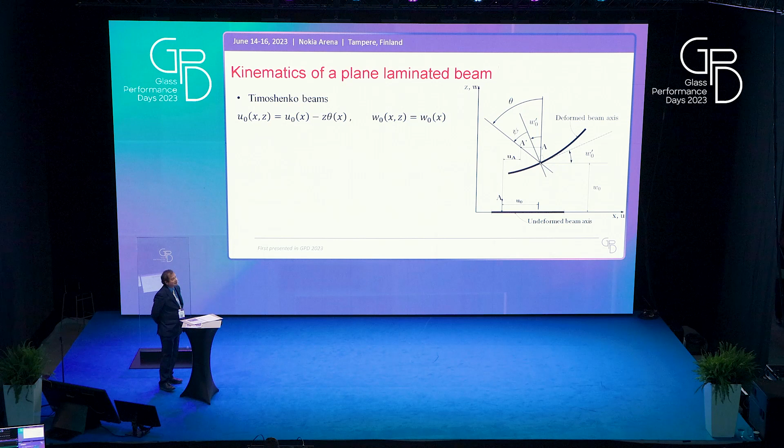So let us start: in a laminated beam it is very important to take into account the shear deformation, and this is taken into account by the way in which the cross-section warps. There are many models which provide different levels of accuracy, like, for example, in the Timoshenko beam, where just the cross-section remains plane.

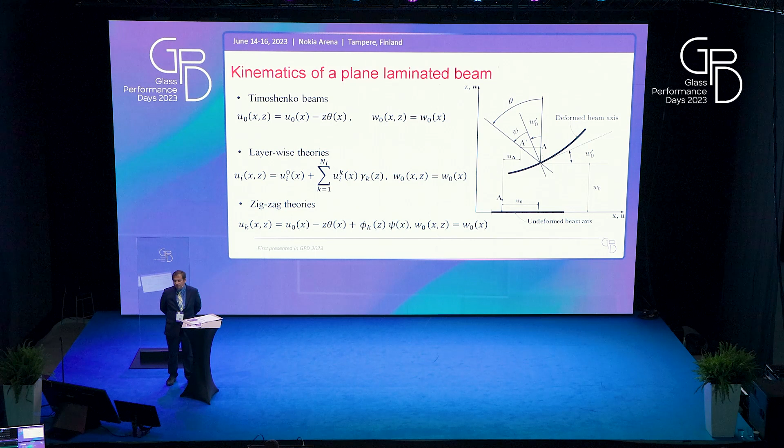Then there are layer-wise theories which take into account the warping via a smooth function, where the shear strain is not constant but varies along the cross-section. Zig-zag theories are very interesting for laminated glass because the warping is associated with a non-regular, piecewise linear function, which provides a shear strain that is piecewise constant in the cross-section. This is just an example of a zig-zag function and the possible warping of a cross-section that comes from this function.

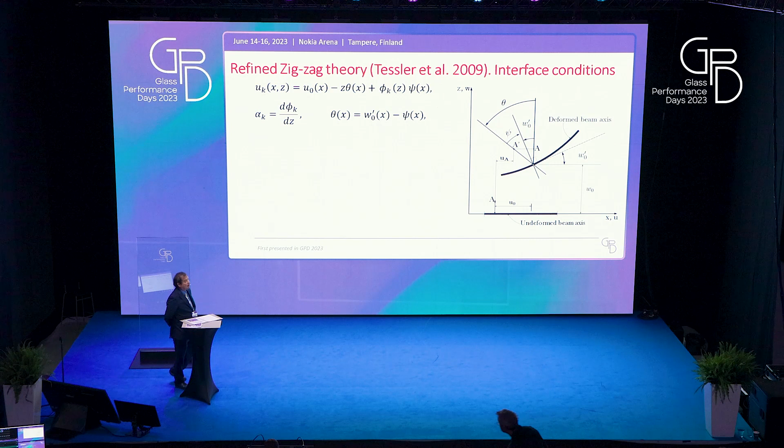In the refined zig-zag theories, the shape of the zig-zag function is not arbitrary but can be obtained from the continuity of the shear stress at the interface between the layers. You can calculate the shape of the zig-zag function from simple equilibrium, and it turns out to depend upon the ratio of the shear moduli of the various layers.

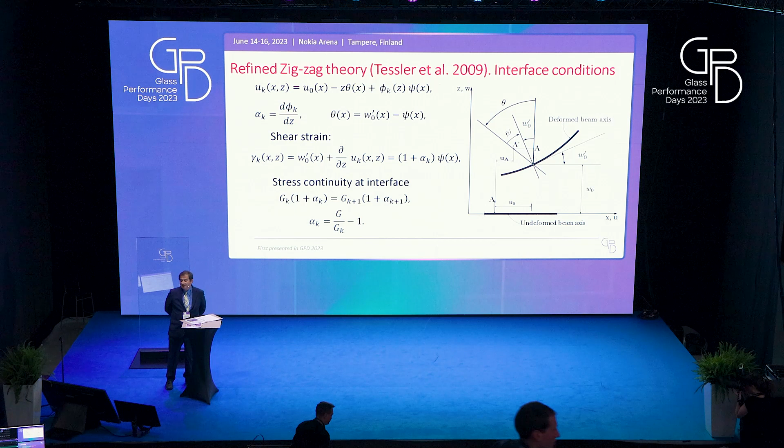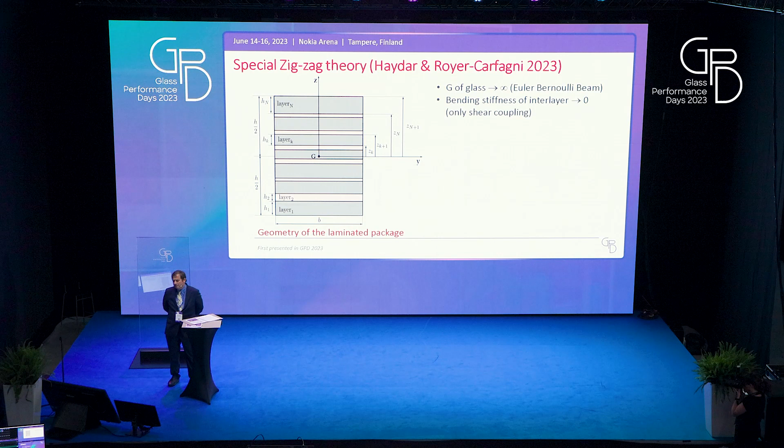What we have tried to do is simplify this model under standard simplifications. The standard simplification is that you neglect the shear deformation in glass, so the glass ply becomes a simple Euler-Bernoulli beam. On the other end, you let the bending stiffness of the interlayer go to zero. This implies that the role of the interlayer is simply to provide the shear coupling of the glass plies.

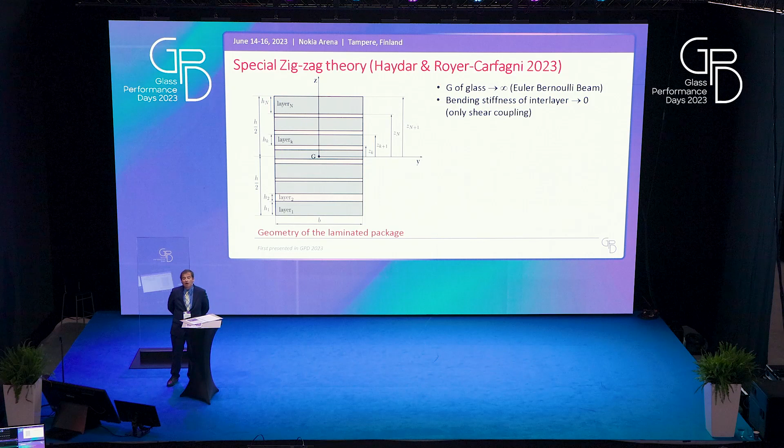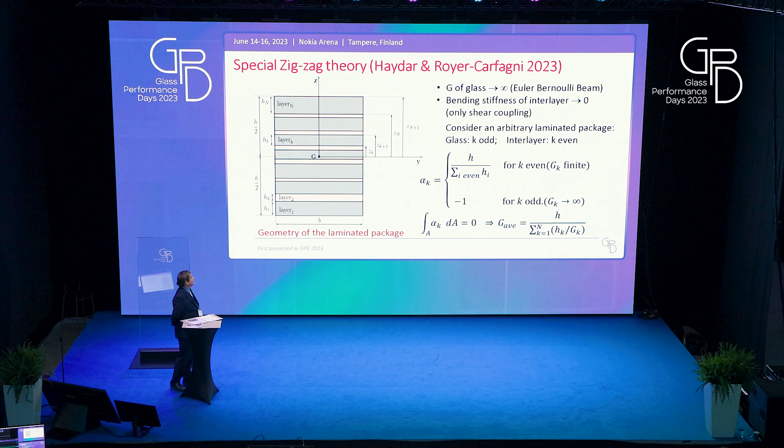If you do this, you have a drastic simplification because the zig-zag function becomes only a function of the geometry and the thickness of the interlayers. In particular, the slope of the zig-zag function becomes -1 on the glass, and depends on the various thicknesses of the interlayers in the other plies, but with no dependence on the shear modulus.

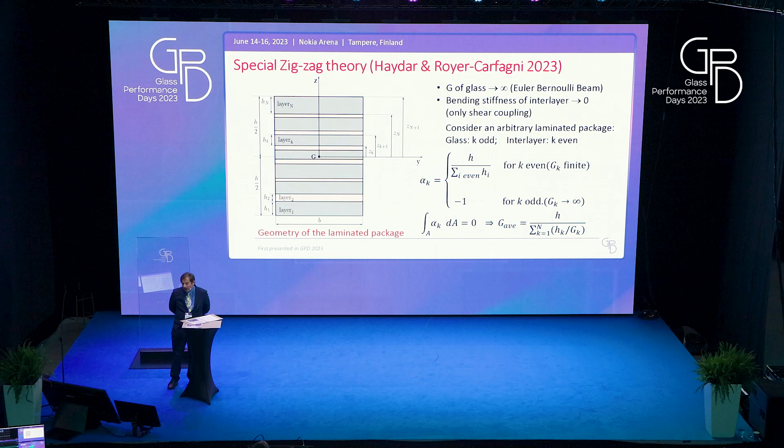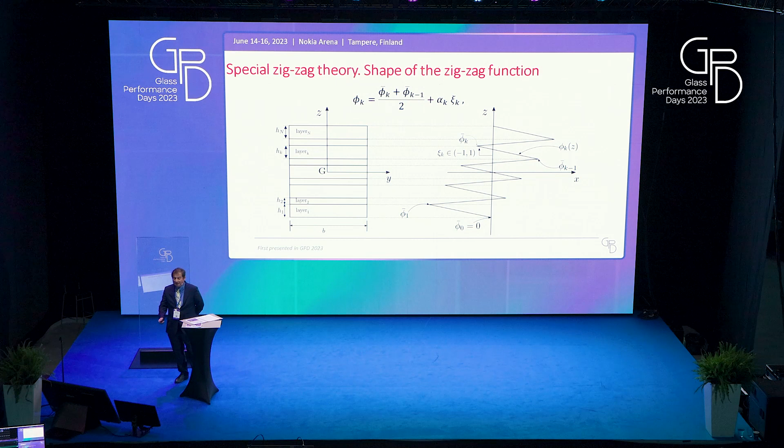This is just an example of the resulting zig-zag function. The important thing is that you can determine this from pure geometry, because the zig-zag function must be zero at the ends, that is on the intrados and extrados. The slope is provided on the glass, and it is also provided in the regions occupied by the interlayer. So, extremely simple.

Now, if you want to build a mechanical model, you have to define, for example, the strain energy and use a variational approach. What we do here is simply say that from the kinematical model you can determine the entire state of deformation of the beam, and you can determine the strain.

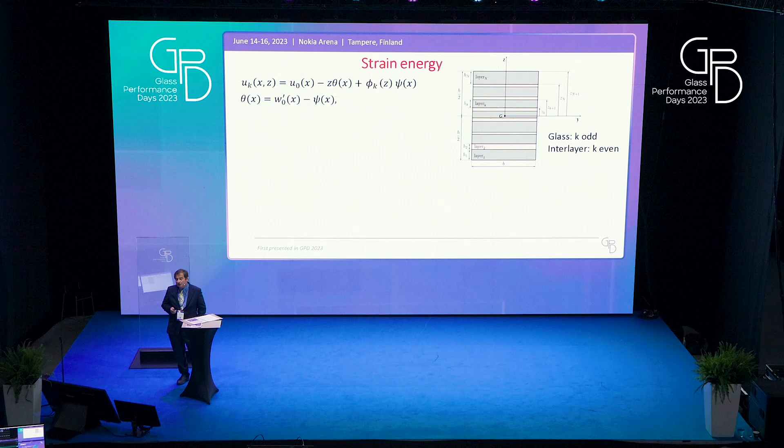We simply say that the glass plies are supposed to withstand bending stresses and axial stresses, whereas the interlayer is supposed to transfer only shear stresses to the glass plies, providing the shear coupling. It is easy from this to calculate all this. The strain energy takes this into account, because the first part is the strain energy of a glass ply, and the second part is the strain energy of the interlayers.

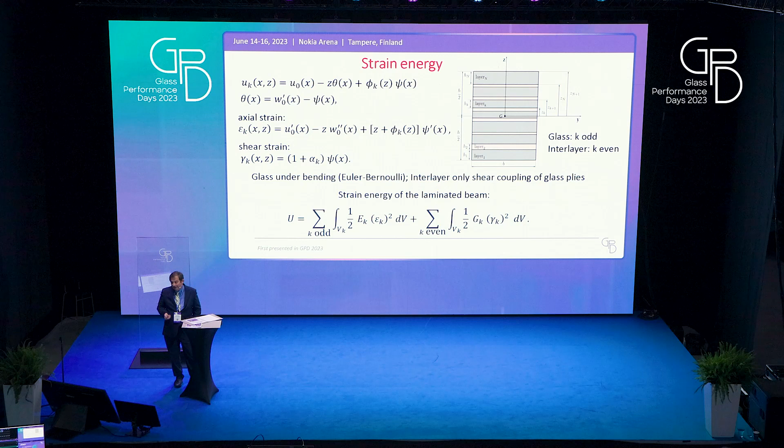For what concerns the analytical numerical solution, you can add any kind of loading and any kind of boundary condition. You obtain via the variational approach the field equations, the boundary conditions at the end, and the matching conditions for any type of geometry, for any type of end constraints.

The variational principle, the variational approach, can also be implemented in a finite element method, very simple and trivial to do. But the nice thing is that the solution of this problem can be found in closed form.

That is, you have a nice, lengthy, but exact expression when the bending moment in your structure is statically determined. So you can determine the bending moment from sole statics, without needing to take into account the deformation of the beam.

And if this is the case, and there are many examples where you can determine the bending moment by sole statics, you can find an exact expression, if you wish, for the effective thickness for any kind of package, whatever the composition of your structure under bending.

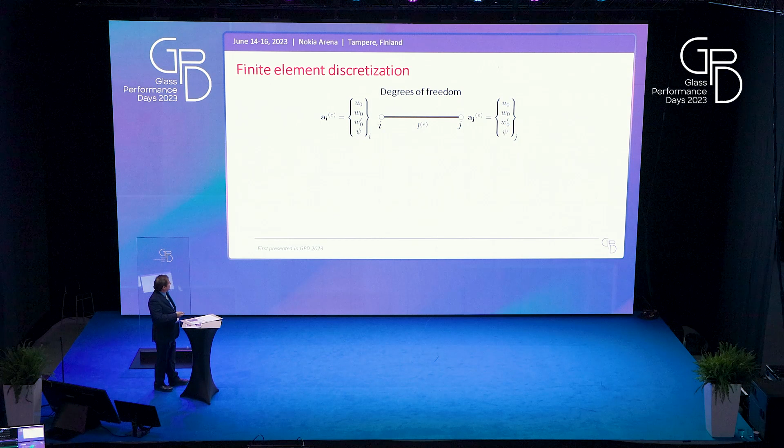The variables are the axial displacement U0, the vertical displacement W0, its first derivative, and the function psi, which takes into account the shearing of the various layers. It multiplies the zig-zag function, which is the same at all cross-sections, but the amount of shearing taken into account by psi may vary from section to section.

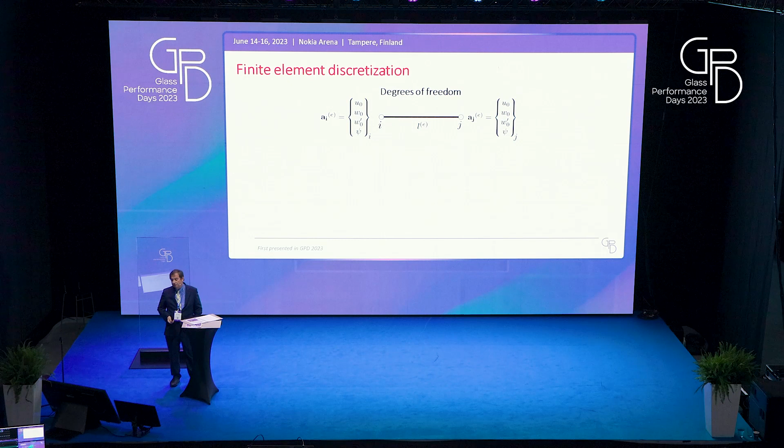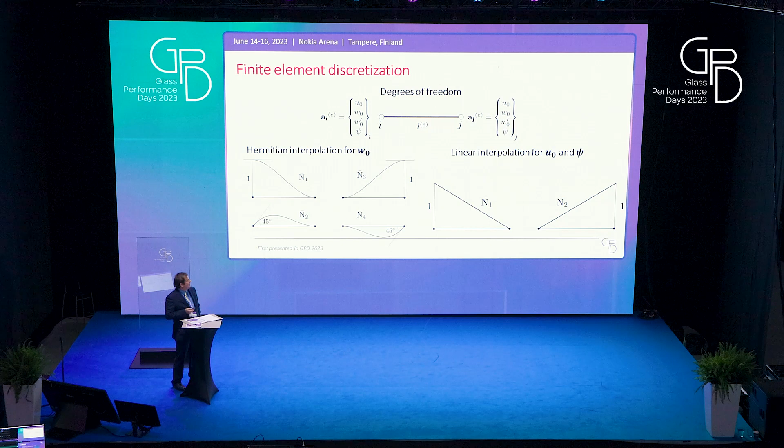So you can consider, for example, taking into account C1 continuity in W using Hermite polynomials, and you can consider a linear interpolation for U0 and psi.

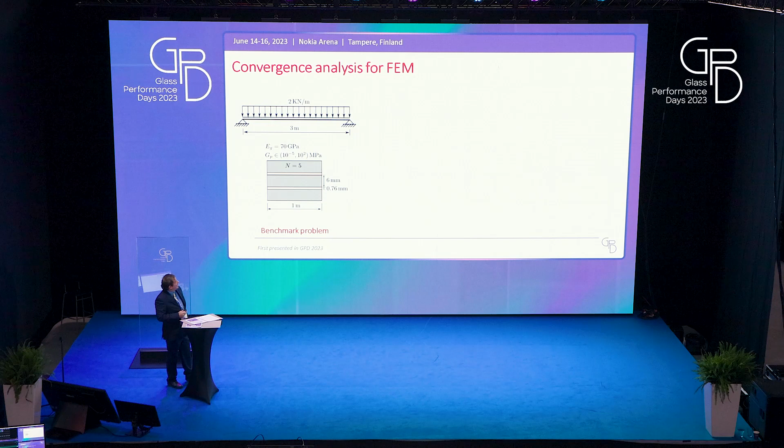This is an example of a convergence analysis for this simple problem. It is a simply supported beam. You can see here what the laminated package is, and you find a very nice convergence.

Here it seems that a large number of elements are needed, but if you are happy with 1% error, you can use 2-3 finite elements for the whole beam.

Now, if you want a very high approximation, you have to be a little more careful. The convergence in terms of displacement is very accurate and very straightforward.

For what concerns the function psi, which takes into account the shearing, the convergence requires a bit more elements to obtain reasonable results.

It's interesting to notice that, for example, psi equal to 0 corresponds to the monolithic limit. In the numerical approximation, it takes a little time to obtain a zero function.

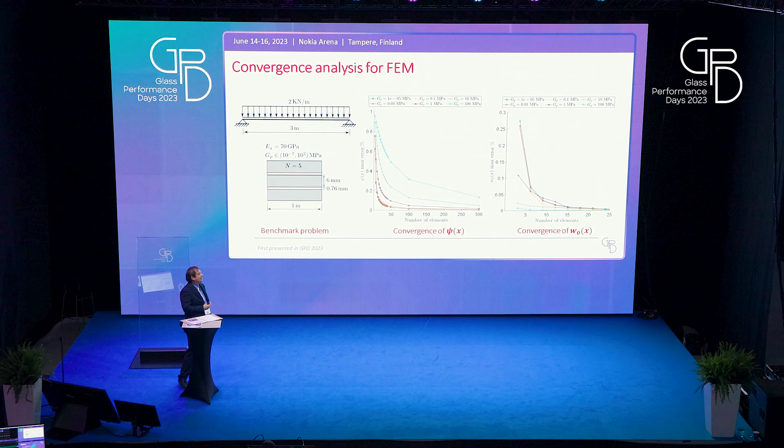On the other hand, when you are close to the layered limit, the function psi takes a certain value that takes into account how much the various plies are displaced with respect to one another.

The convergence in terms of W0 is very straightforward, with errors small even with just 2 or 3 elements. It's very fast because in terms of displacement, errors are usually very small since the deflection is only mildly influenced by other parameters.

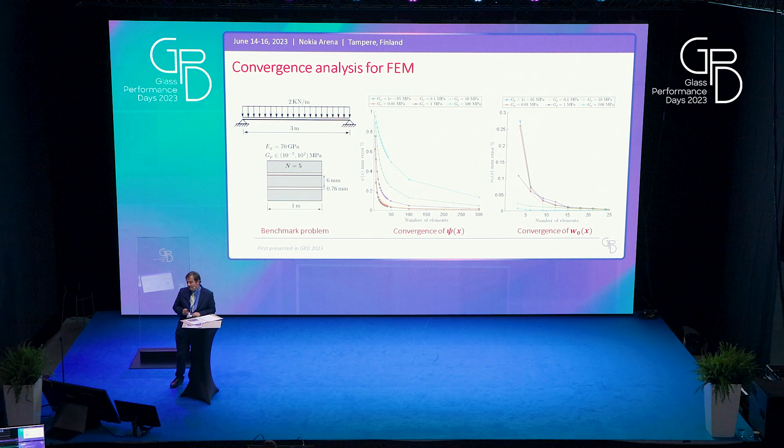It is not the case for the state of stress. Now I'll show you a simple application, the same one that Adam showed this morning. This is just an example.

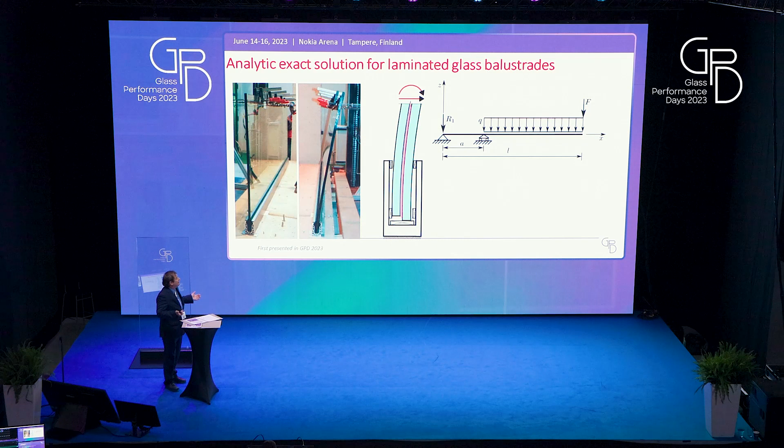Of course, you can use the theory for whatever boundary condition you want. Here it is a cantilevered laminated glass balustrade.

The important thing in this model is that the shoe produces a constraint that can be interpreted by the static scheme on the right-hand side, in which you have a very short, simply supported beam with a long overhang.

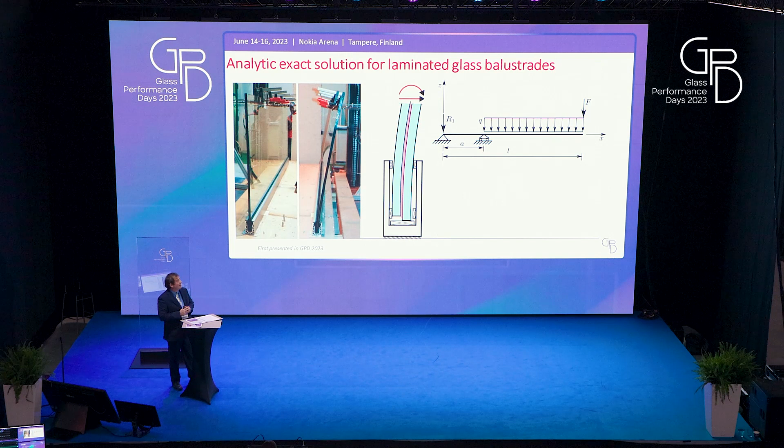Another feature of the boundary condition is that in this kind of static scheme, you allow for the cross-sectional warping at the end of the beam.

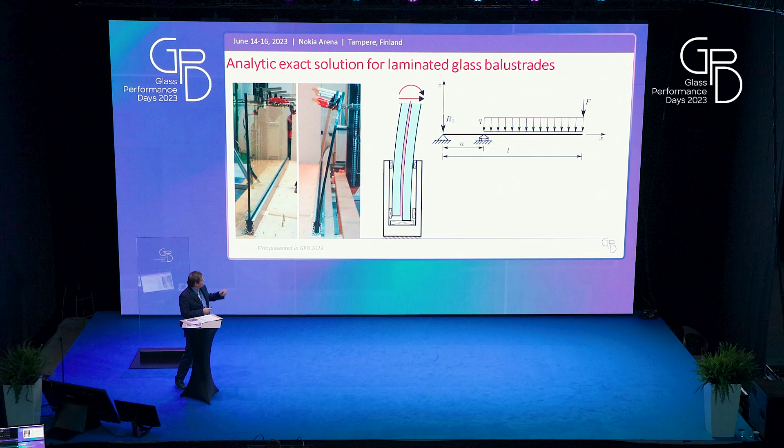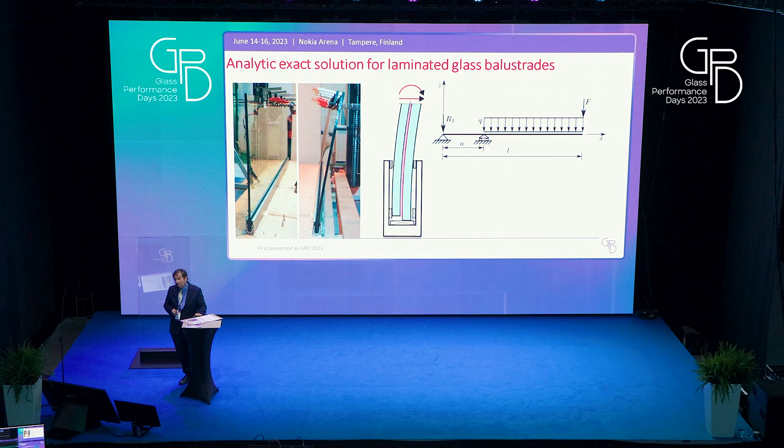On the shoe, you can see in this picture the relative sliding of a glass ply, and this can be easily taken into account in the model by the boundary condition of the function psi.

So in variational terms, you have just the natural boundary condition of psi at x equal to 0.

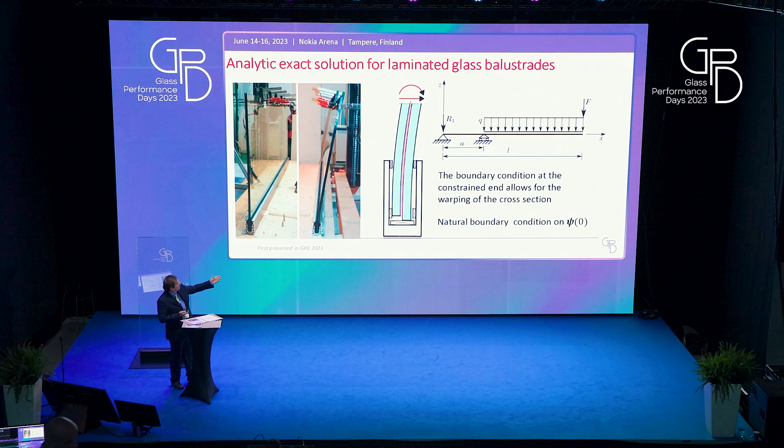We have considered just two loads: a uniformly distributed load on the overhang and a concentrated force F at the tip.

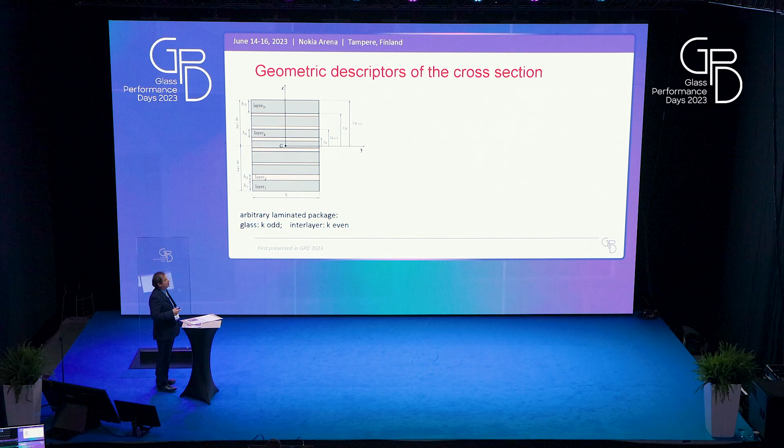The analytical solution is based on geometric descriptors. When you have the bending of a monolithic beam, you may have a moment of inertia of a cross-section.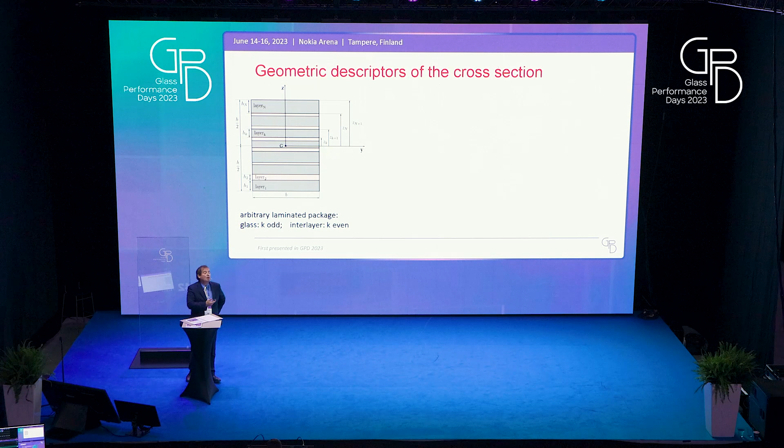Here you have other functions which depend on the geometry, because they are correlated with the shape of a zig-zag function. They are simple second-order moments of area.

The calculations are relatively simple when the cross-section is symmetric, but these are the quantities that enter in the differential equation. It's just a geometric description of a cross-section, slightly more complicated with respect to the simple bending of a beam, but it can be easily calculated.

So the governing equations are these. You have the boundary conditions and the interface condition on the central support. I won't go into detail, but if you change the boundary condition or the constraint, you have other functions to take into account.

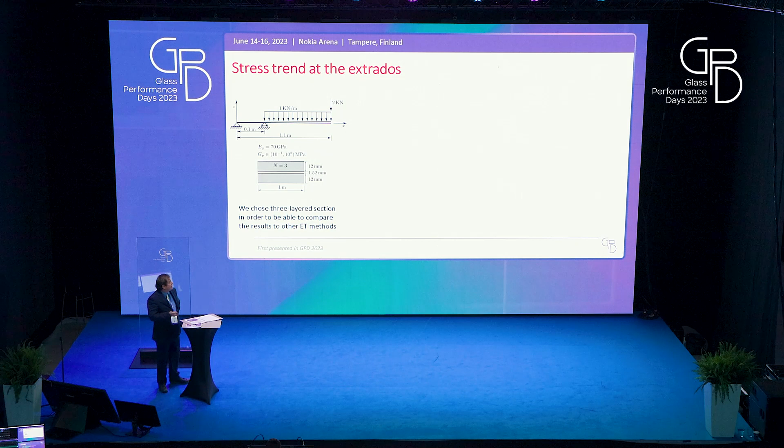This kind of equation can be integrated in closed form whenever your structure is statically determined. So whenever you can determine the bending moment from pure statics, you can find an analytic solution. I just considered this simple problem with a symmetric cross-section because it is the simplest I can imagine.

These are the results of the state of stress at the extrados of this structure. The first graph is for the uniformly distributed load. The second is for the tip concentrated force F. I suggest starting from the second graph.

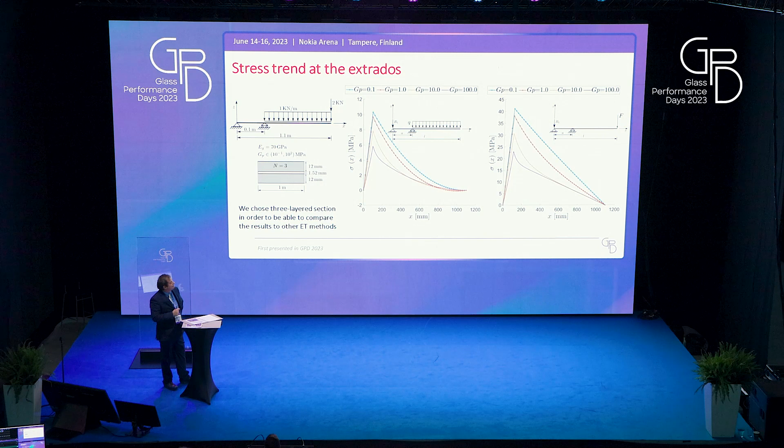You can see that the bending moment should be linear in the two parts because you just have concentrated forces. So if the beam had a constant cross-section, you would expect the stress at the extrados to also be linear. You can see that it is linear in the limit, when the shear modulus of the interlayer—these are various graphs for different shear modulus of the interlayer.

The light blue curve corresponds to a very soft interlayer. You can see that it is linear, but if the stiffness of the interlayer becomes stronger, you have a deviation from the linear trend.

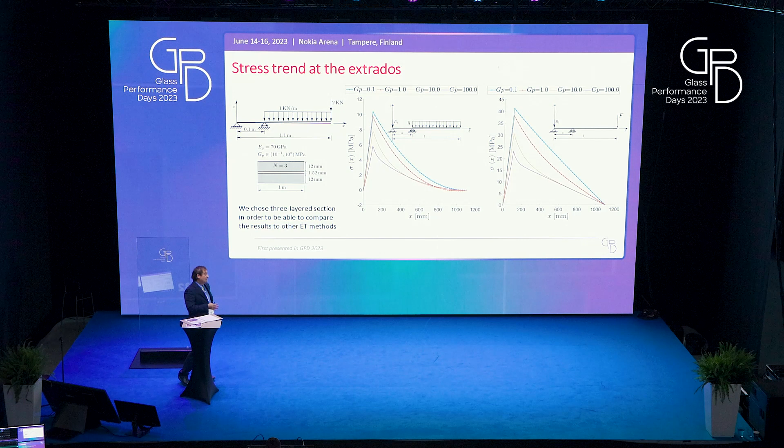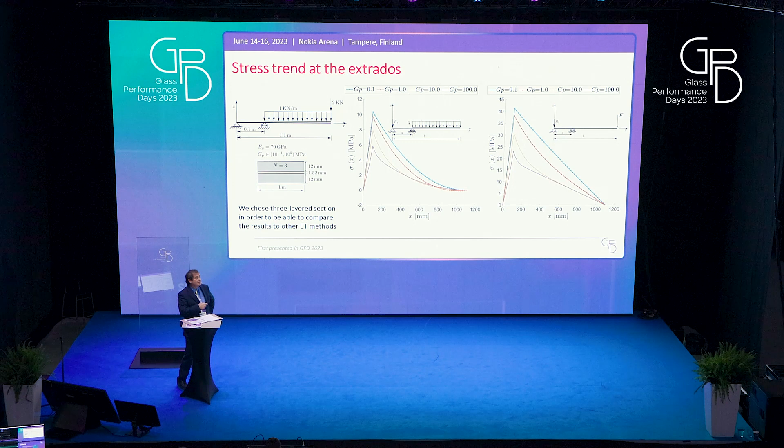So your beam behaves as if it had a variable cross-section, and the reason is that the shear coupling of the glass ply through the interlayer is different from section to section. This is why you don't have agreement of the shear stress with respect to the diagram of the bending moment. There are other interesting features, but I don't have time to go into detail.

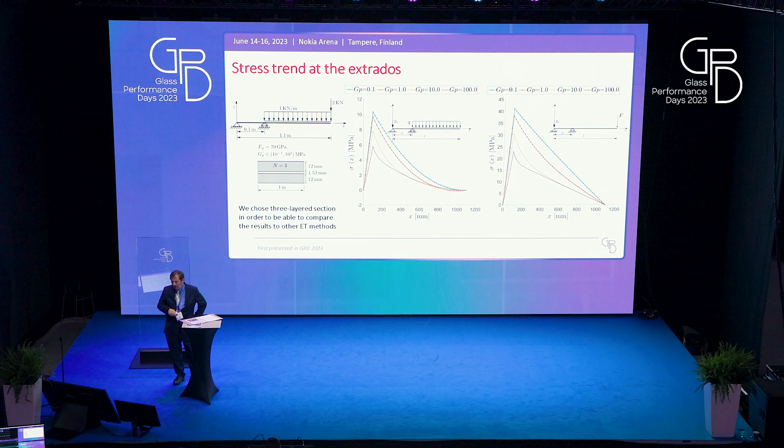So you can find the exact form of the effective thickness for this case. The expressions are very complicated, but you can use an Excel file. You do that once, put it in your Excel file, and you have all the coefficients, which depend on the various elements.

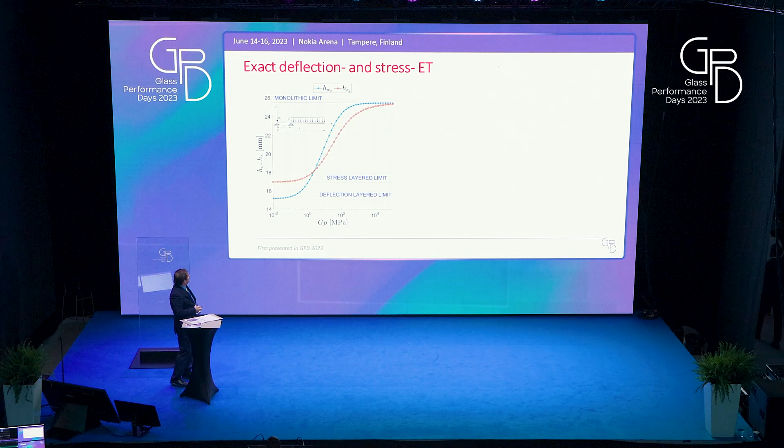So let us look at the shape. On the abscissa you have the stiffness of the interlayer, and on the y-axis you have the effective thickness in terms of stress and deflection for the two load conditions that I have considered.

To be noticed is that even if you have a very stiff interlayer, meaning a stiffness of the order of 100 MPa, this is not sufficient to provide a monolithic limit. The reason for that is the size effect of this beam.

Because you have a very short, simply supported beam, with a very long overhang, you have a very high shearing in the neighborhood of the central support. So for a situation like this, it is always very hard to reach the monolithic limit, and you have to do your calculation.

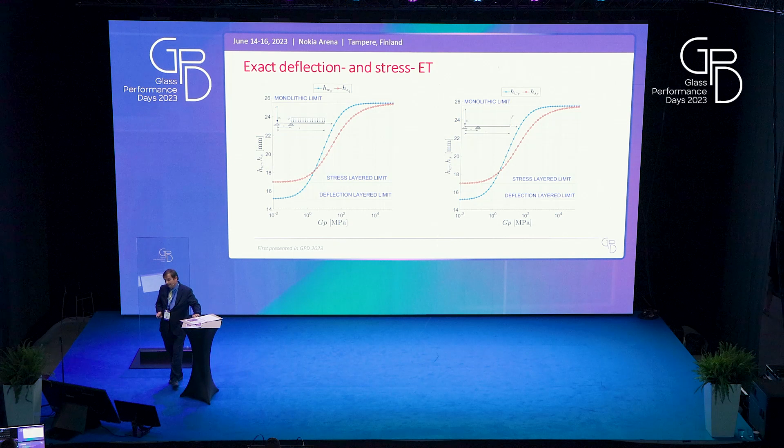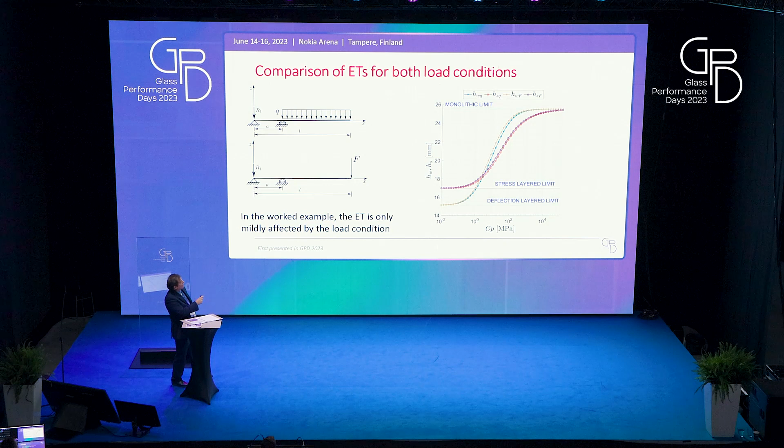For both cases, another nice thing is that for this particular example, the effective thickness is only mildly affected by the load conditions. So more or less the two graphs are the same.

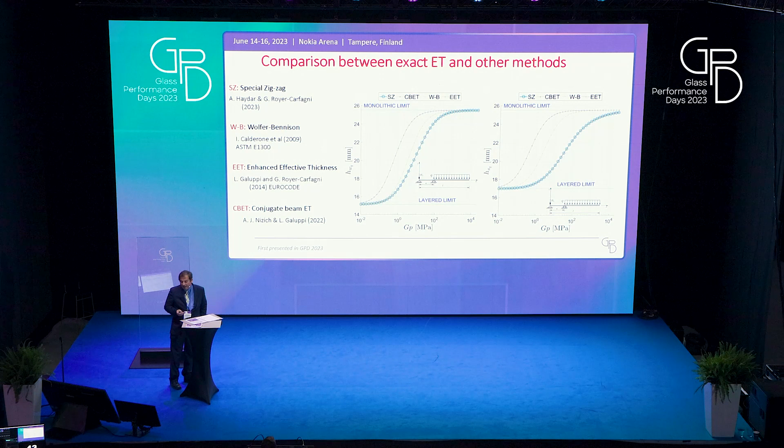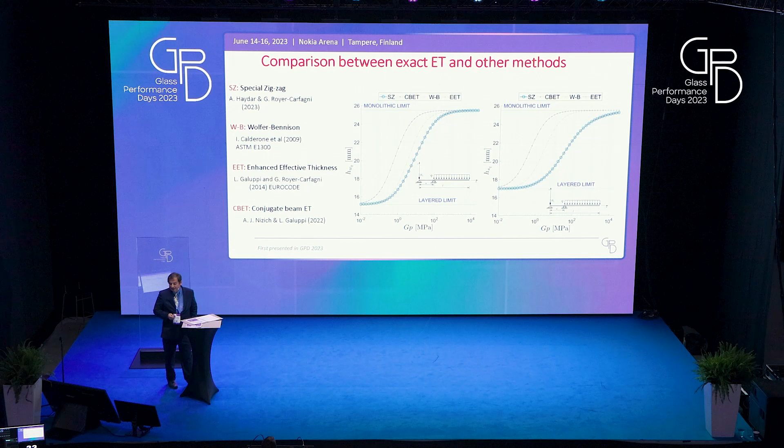This is a comparison with other methods. For example, we used the special zig-zag function method, the Wolfer-Bennison, the EET, and the recently proposed conjugate beam ET. You can find that there is perfect agreement with the conjugate beam ET, but as anticipated, you may have some problems when using the Wolfer-Bennison and the EET approach.

So, my final slide: what we have done is presented the special zigzag theory for multi-layer laminated beams that can be applied to any kind of laminated package with no problem. It provides an exact solution when the structure is statically determined.

We have proposed a paradigmatic example of a simply supported beam with a long cantilever overhang. We can derive, for whatever boundary condition, the exact expression for the stress and deflection effective thickness. We have verified that other ET methods are not accurate for this case.

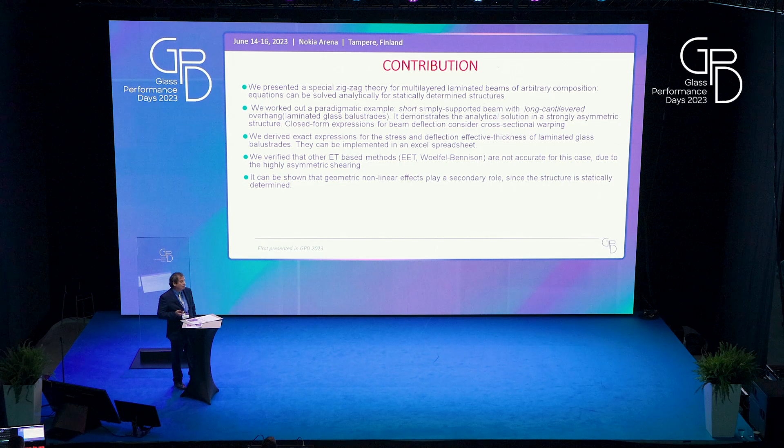I'm sorry I took a little bit of time to explain this model. I'd like to finish with a quote from Leonardo da Vinci's treatise on painting, on the error of those who use practice without science.

Those who fall in love with practice without knowledge are like the helmsman who enters a ship without a rudder or a compass, who is never certain where he is going. Practice must always be built upon a good theory.

And in this case, I think that a theory—I don't know if it is good, but it is certainly a theory—that it is validated by calculation. I think it can save a lot of time and also a lot of money in experiments. So I thank you for your attention.